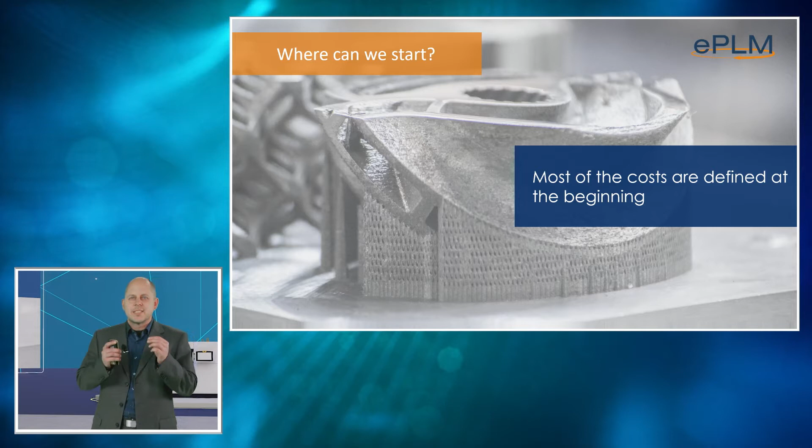So far, we have always looked at individual components of a product. But in order to unleash the power of additive manufacturing, we must look at the product as a whole and include it in the development process. So let's take a closer look at the development process, and especially at the area where the greatest impact on cost definition is. This is at the beginning of the product development.

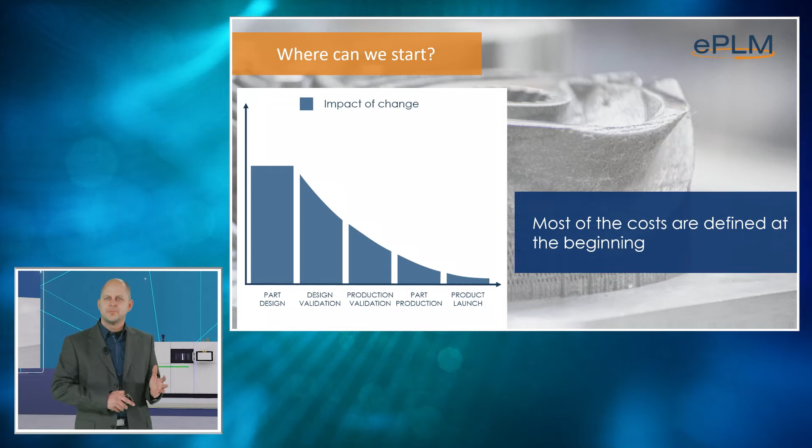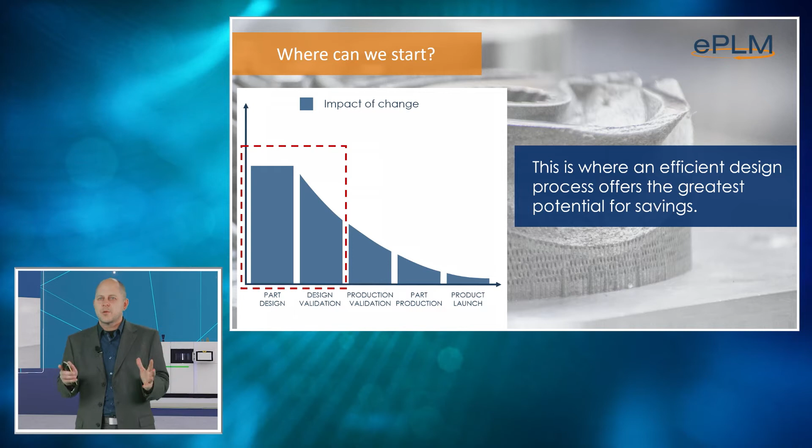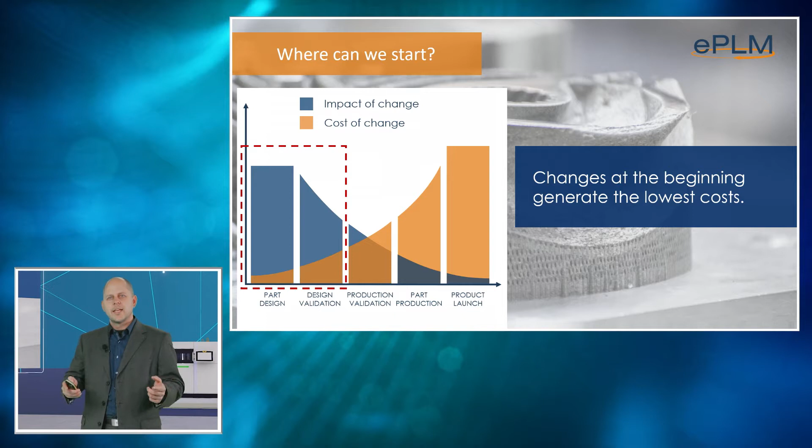Here are the greatest possible savings and optimization potentials for the entire process. That means at this point, we must manage to reduce the later error rate as much as possible. So if we can detect errors in the design much earlier, it saves a lot of time and money in the product development. You all know it from your own experience.

The later an error is detected, the more expensive it is to correct. The costs here increase by a factor of about 10 at each step in the development process. And that is the key to cost optimization at the beginning of the product development process. And I would like to show you how additive manufacturing can help us to get it right at the first attempt.

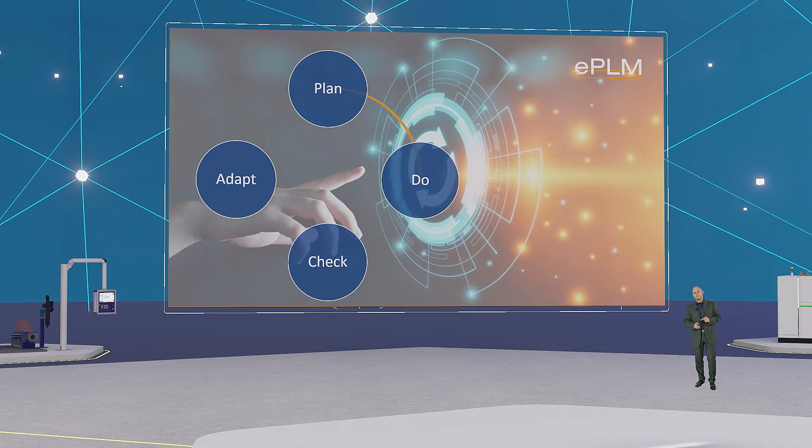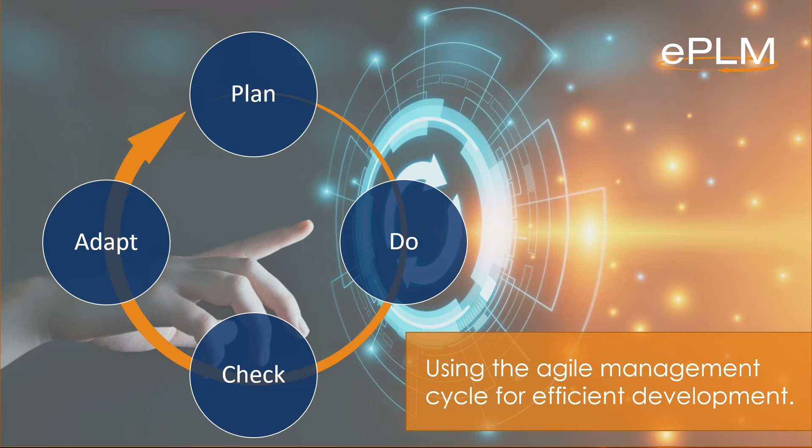So what might an approach look like that opens up this potential? In order to get the product right at the first attempt and reduce time and costs in product development, we use an agile approach. Multiple iterations in the early phase of a product development give us the opportunity to create the right product according to its requirements. And additive manufacturing fits perfectly in such an agile process.

Because additive manufacturing gives us the possibility to validate our products and components right from the CAD system as a real product. Through it, we have the possibility to have the design review done parallel to the engineering work. And that means the designer can check and adjust the design at any time in the process. Up to now, this development approach has failed because the designer had to use a modular system of different software solutions.

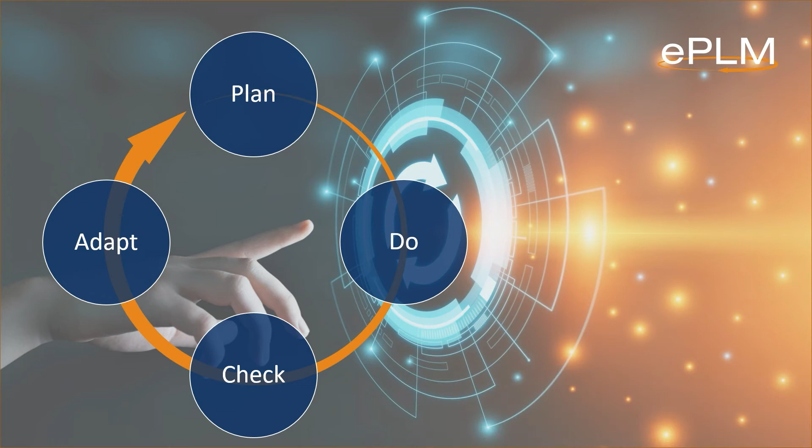Through this very agile and iterative approach, with the interplay of do, check and adapt, we move from the previous approach, design for manufacturing, to our new approach, manufacturing for design. This is a paradigm shift in the development process. And of course, this requires a new type of designer. After all, the possibilities of additive manufacturing must be taken into account from the very beginning of the design and development process.

Today's products have higher requirements. We all know it. They should be lighter, stronger, and cheaper. This is very challenging for the designer. And to manage these challenges, the actual design process must be rethought. The manufacturing process of additive manufacturing offers great design freedom and possibilities. These include, for example, topology optimization. We can create bionic designs or lightweight construction using lattice structures. So you need an integrated tool chain that supports the designer in his work.

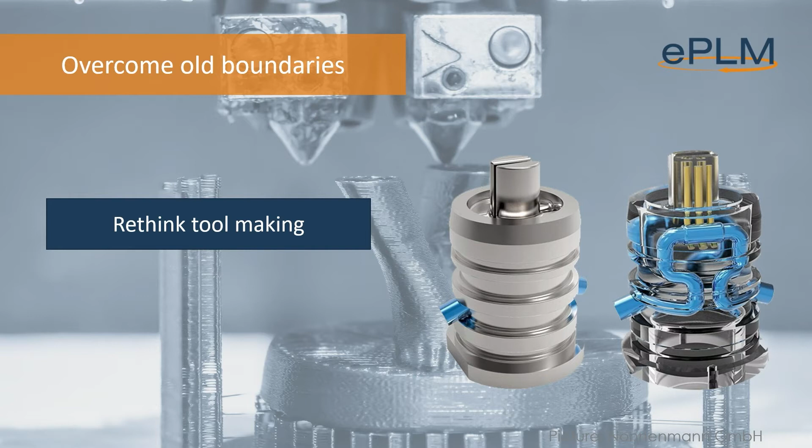But only if designers are open-minded to these new approaches can additive manufacturing truly change the product development process significantly. And I would like to show you an example of this. Let's take a closer look at the result by thinking out of the box and openly exploring the possibilities of new technologies.

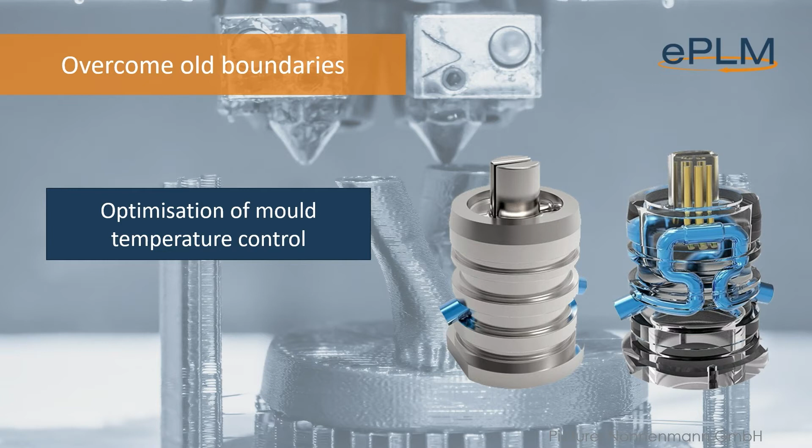Injection molding tools are very good examples. By using additive manufacturing, we can produce a tool that has a significantly higher performance thanks to the optimized near-surface tempering, which could not be produced in this way without additive manufacturing.

And we have here 5 big benefits of this. We have higher cooling capacities. We get better quality of our components. We shorten our cycle times and reduce the scrap rate. And the best thing, we increase our output quantity.

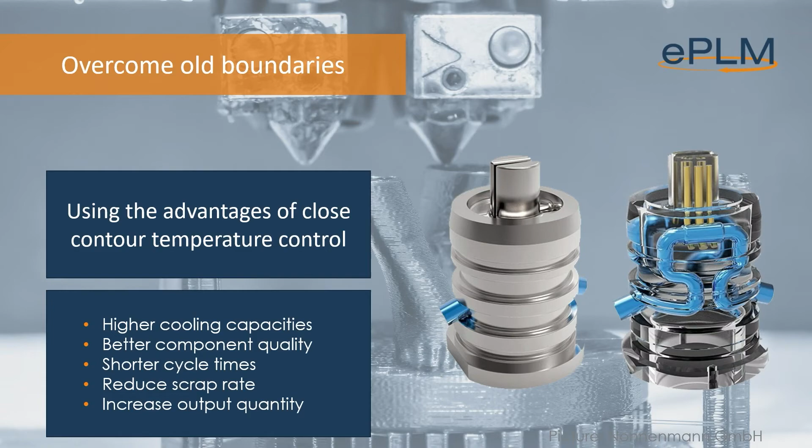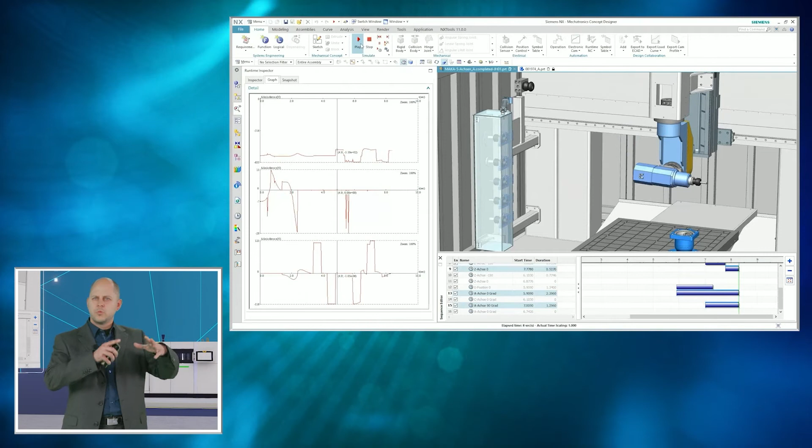So now we'll have a look at the whole development process and how it looks in the integrated tool NX. Here we start with a collection of data and parameters. We said at the beginning that the key to success is not only to see the individual components, but how they relate to the entire machine.

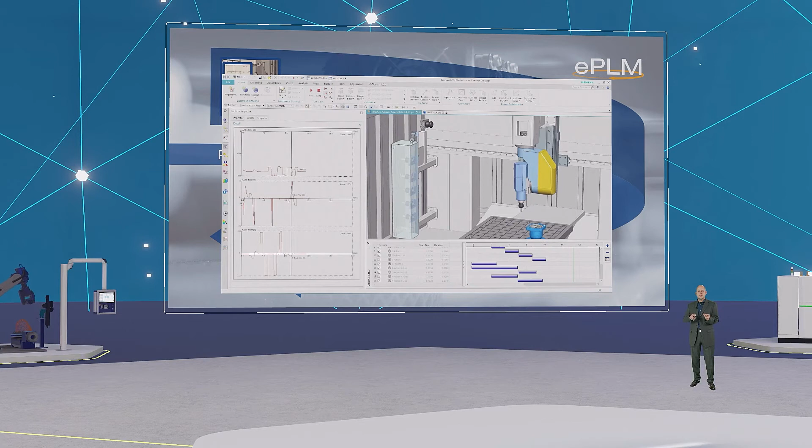We look at the movements, measure the forces acting, and look at the movement radii that are necessary. And after evaluating the analysis, we set the necessary parameters for the further construction.

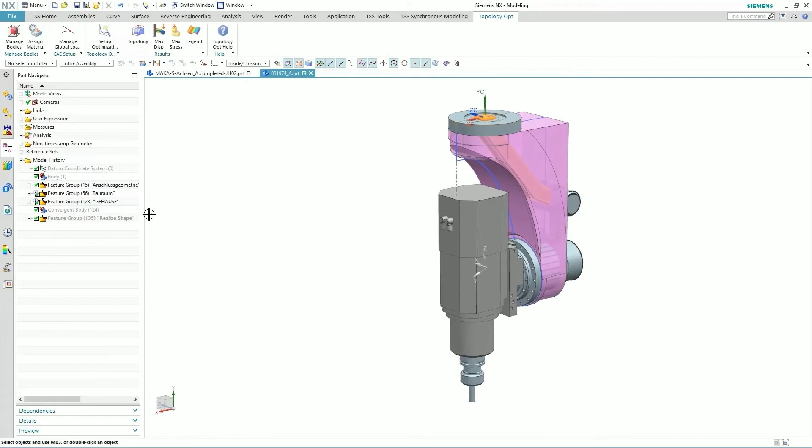The second step is about generative design. We create a first design draft on the basis of the recorded data using the topology optimization integrated in NX. Here we define the design space, in the video shown in pink, the bodies and cutouts as well as the forces affecting them, and the system calculates a design proposal from this.

And at the end, we get an evaluation and presentation of the maximum stress and maximum displacement with color legend and calculated values. And this generatively created design now forms the basis for our further mechanical construction.

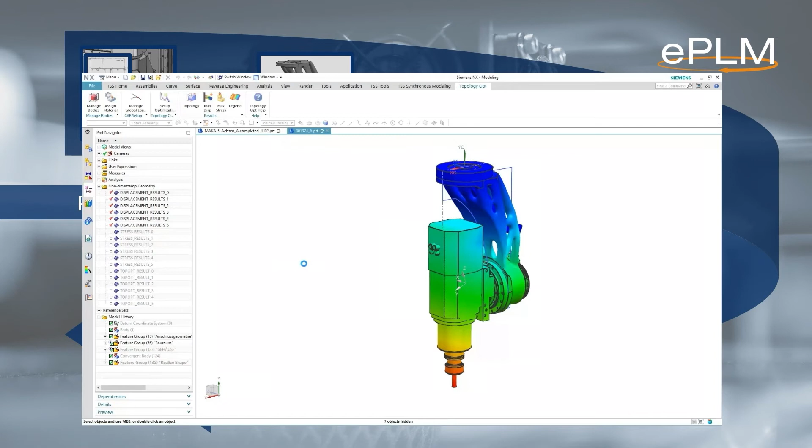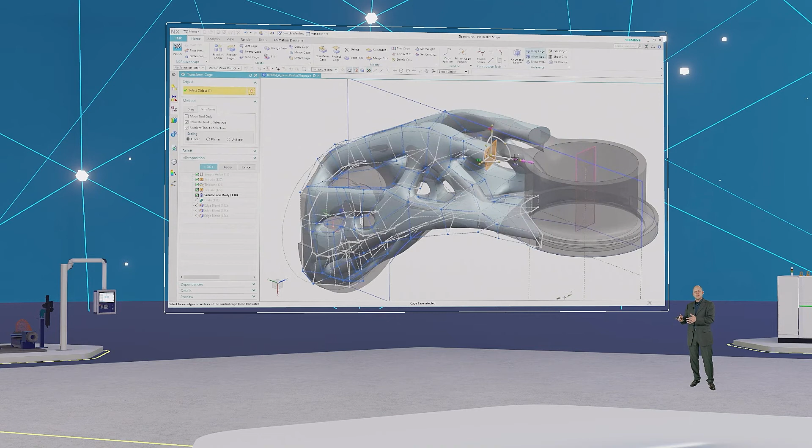Now we take this generated design draft and process it further using the convergent modeling technology and also the Realize Shape module directly in NX. The convergent modeling technology gives us the possibility to complete and combine the facet data with the precise BREP data. This means that we can adapt and complete the topology according to our design ideas and fully use the maximum design freedom.

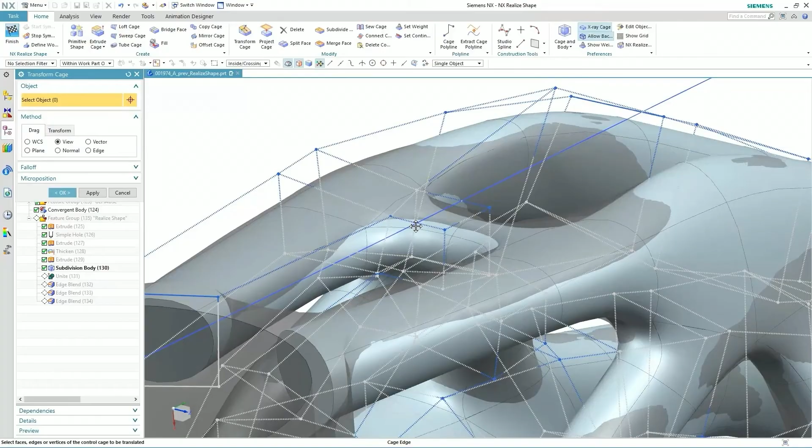And thanks to this easy-to-use topology optimization, which is integrated into the CAD module, we can create a design that meets our requirements and is open for changes without a great time investment.

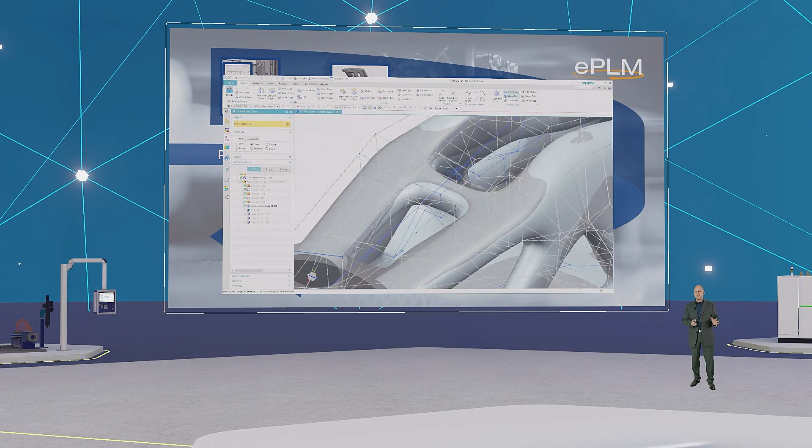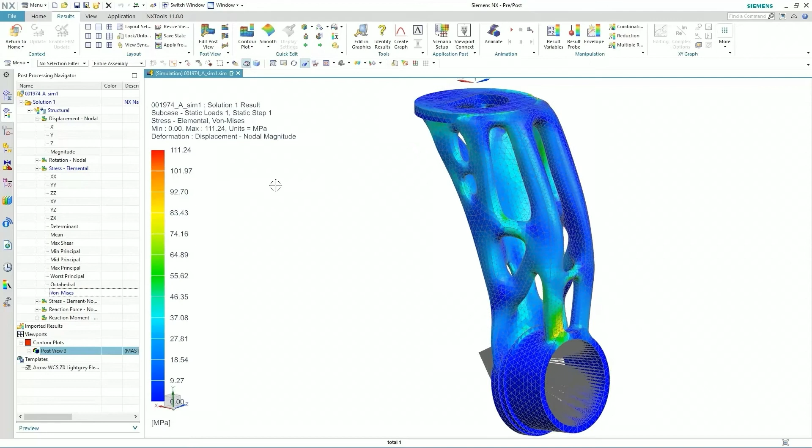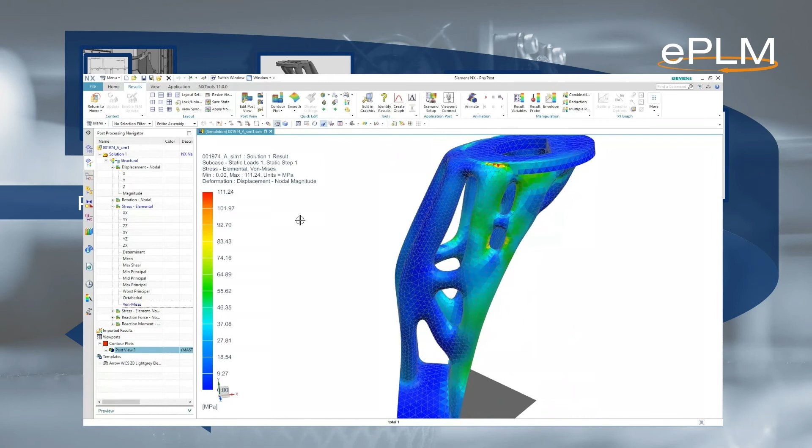Now we have adapted our model and we check if our part will meet the requirements. For this purpose, we have integrated the whole range of simulation functionality of Simcenter 3D in NX. So we hand over our model and put a mesh over it. We enter the movements and forces to be measured and then simulate the effects on the component.

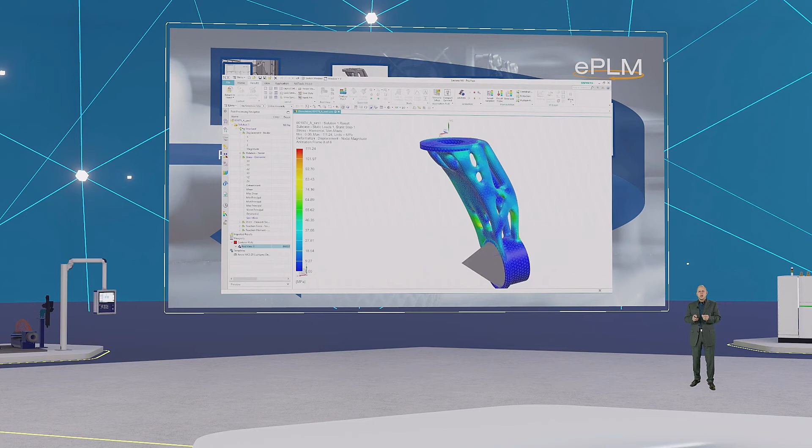Using a color scale on the component, we can see where the weak points are, which we may need to adapt and optimize. In this way, we can test the component extensively before the actual production without doing expensive, destructive test measures. This saves time and cost in development and leads us to the goal of our one first attempt.

Now we came from the area of product design to the production preparation. Another very important component of the development process that has to be considered from the beginning is actually the manufacturing process.

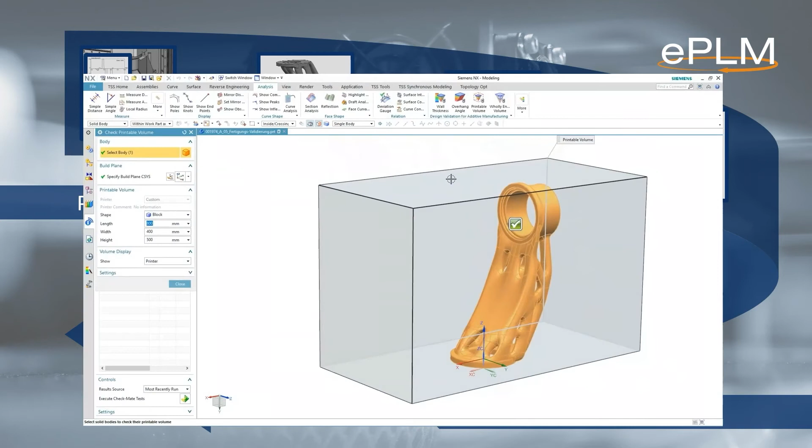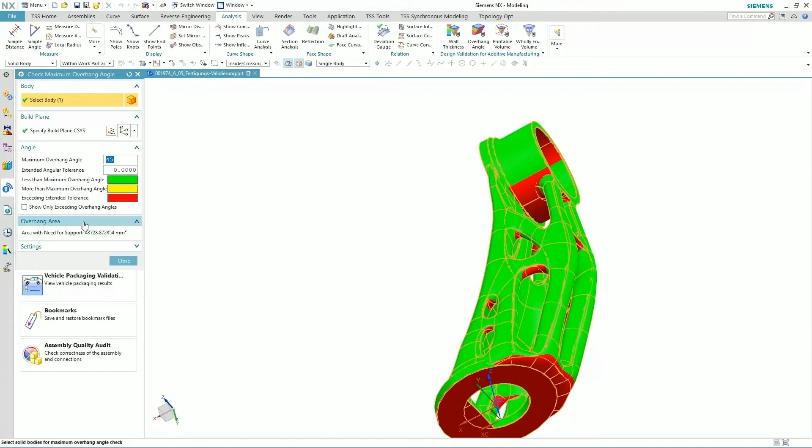Thanks to the complete bidirectional associativity in NX through the universal data format, we can include the part of the manufacturing validation from the beginning in the development and always check if our design draft is to be manufactured as intended. And depending on the manufacturing process, we check overhangs, wall thickness, wholly enclosed voids for the manufacturability.

And this enables the construction and design development department to work even more closely with the manufacturing preparation department. This is only possible thanks to the integrated software solution of NX and the agile and iterative development loops, which can save a lot of time and money.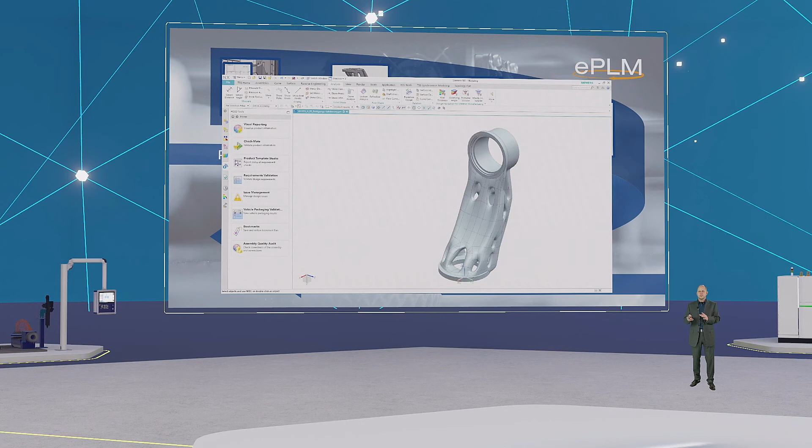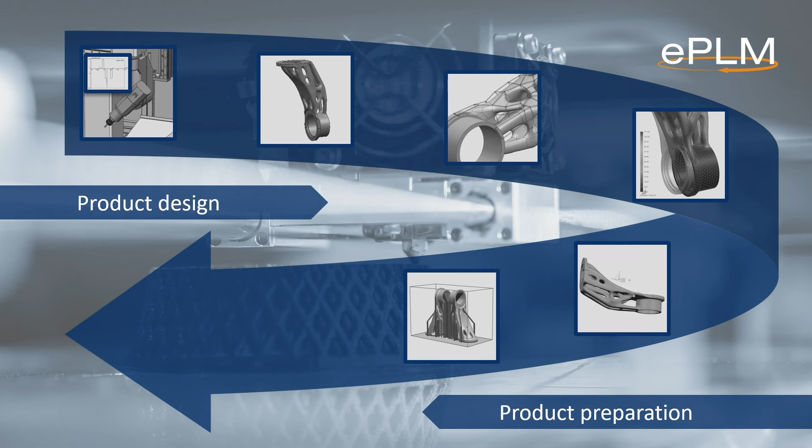Once the final design and manufacturability have been validated, the component can be manufactured. The production is also controlled in 3D printing directly from NX. The support structures can be created manually or automatically, and then you can freely adapt them. As soon as the component is ready for printing, it is transferred to the relevant machine and printed.

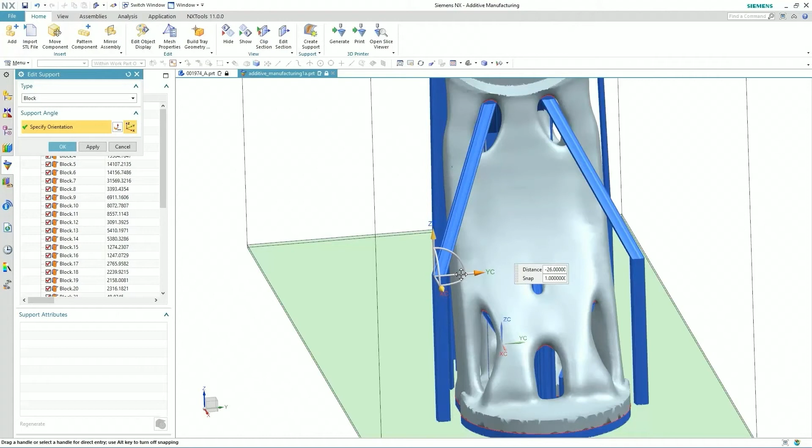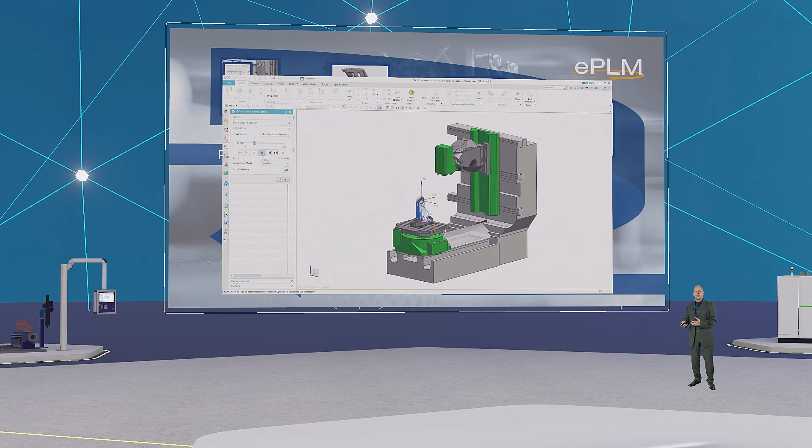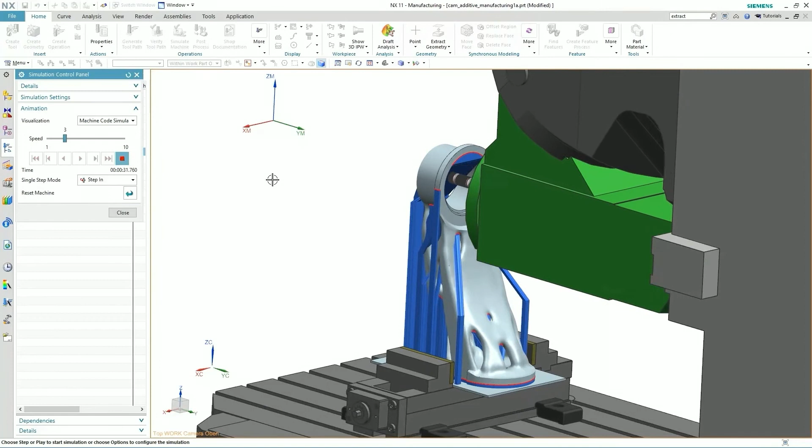Because of the integrated toolchain of NX, we can also use all the CAM functions and machine simulations for additive manufacturing. For example, for the post-processing of our component, you can prepare the removal of support structures in metal printing by a milling machine from the very beginning, test it by pre-simulation and integrate it into the overall process. Also, the separation from the printed plate via EDM is possible and very easy to program.

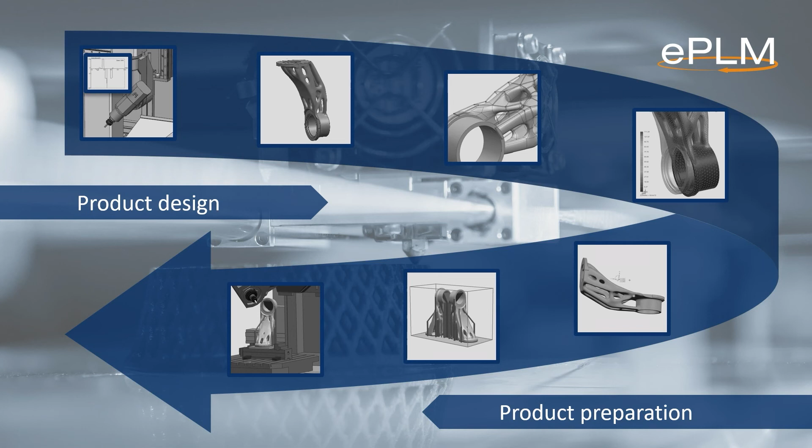Here you see now very well the whole integrated process in NX with all the different steps you need in your product development in one software solution. At the beginning, I promised to show you how you can use this opportunity offered by additive manufacturing successfully. So I would like to offer the following advice.

Change your product development to an agile and iterative process by leveraging your open-minded designers. And use an integrated design software solution like NX to support your designers in this new holistic process. Save time and money by opening up the potential of additive manufacturing in the design process.

And if you implement these points in your PLM process, you can market your products faster by getting your products right at the first attempt and secure the important competitive advantages.